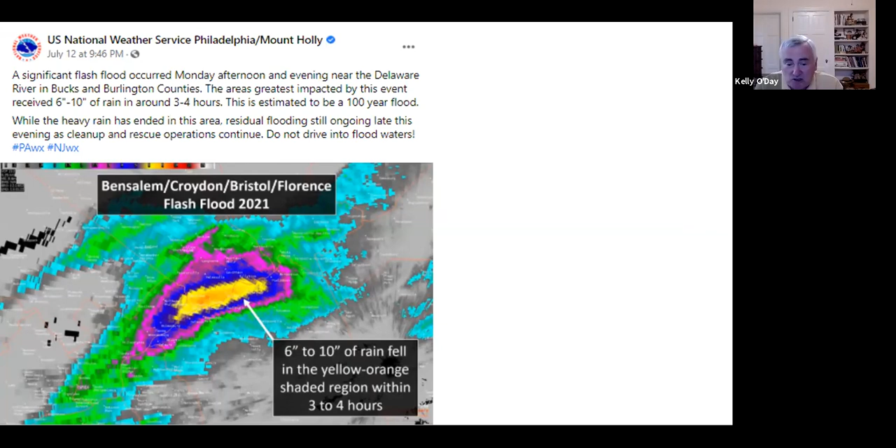In one area, like Germantown, we might not have seen much at all, and yet they got 6 to 10 inches of rain. So it's almost like a luck of the draw when a storm like this comes through, how much you get, and therefore whether or not you get a particular flood. So let's talk a little bit about this area, which was close to us. 60 homes were flooded out, so I think it's important.

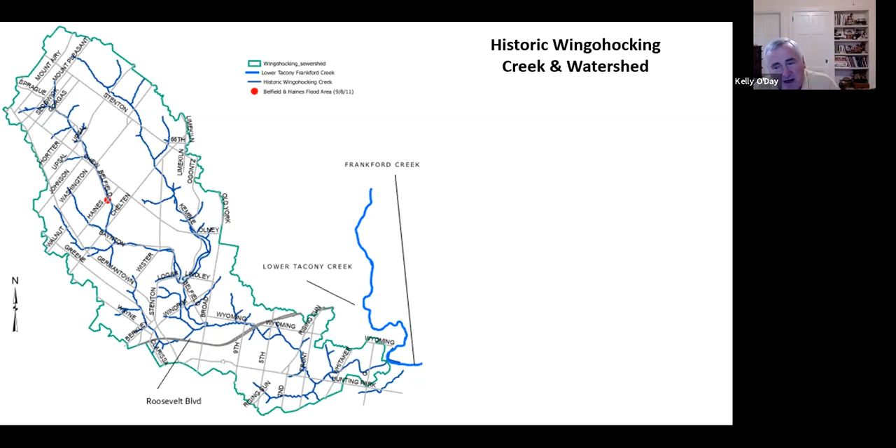If you don't mind, Kelly, if I could just ask real quick: does it being underground in a covered pipe, not exposed, help with flooding at all, or does that really not matter? It's going to come no matter what? It actually is going to come no matter what.

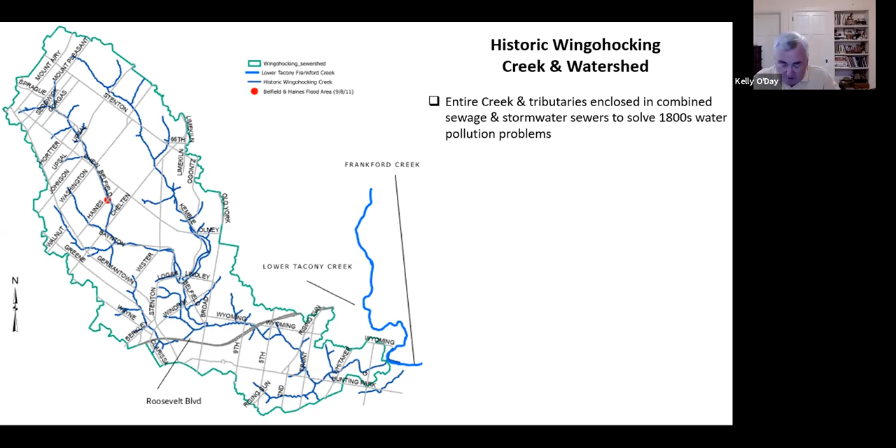It doesn't help. If you think about a lot of creeks, as we put in a lot more impervious cover, the banks got bigger and wider to accommodate the higher flows. Pipes don't get any bigger. The pipes were put in about 100 years ago with the best engineering of its time, and frankly today they're just not big enough. So it's the same as having a creek run straight through our neighborhood? It is a creek. In fact, you don't see it, but if that pipe is overloaded, it has to come to the surface, so it's just like every other creek.

So it was covered to solve water pollution problems. Now, in dry weather, all of our flow, that is all of our groundwater going into the sewer as well as our domestic wastewater, makes its way down to the Northeast Water Pollution Control Plant, right on the Delaware by the Betsy Ross Bridge. Everything works fine, it gets treated there and goes out into the Delaware River.

However, if we get a rainstorm like the one we just saw up in Bucks County, it'll overflow into what's called the Frankford Creek. It's the Tacony-Frankford; the Frankford is the part down by Juniata Park. And if it's bad enough, it will back up into basements and come out of inlets onto the streets. So it's nothing new. Basically, the creek was there, it had to be buried and covered, but we've got this problem.

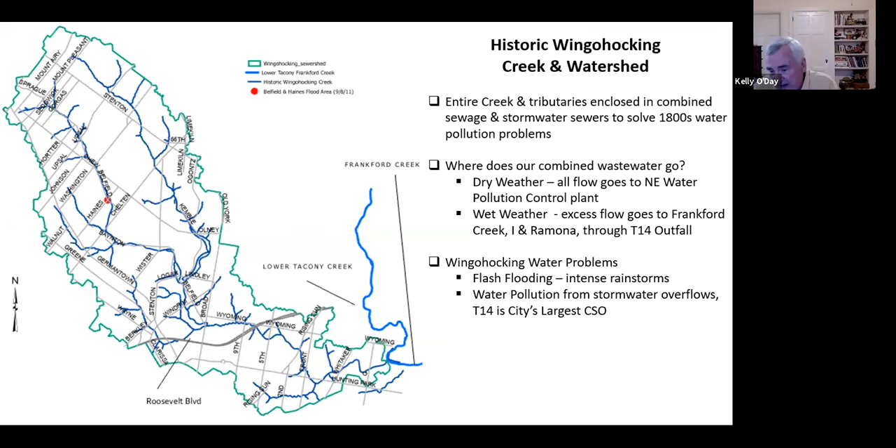So today, the Wingohocking is one of these unique areas in the city. We have a flash flooding problem with certain big storms because the pipes aren't big enough. And we have a water pollution problem when we get about a half an inch to an inch of rain. We'll overflow at what's called T14, which stands for the Tacony Creek, number 14 combined sewer overflow. We have a combined sewer, both stormwater and sewage, and in rainfall events we have a pollution problem coming out of that overflow. Now, this is what T14 looks like.

Again, that's the overflow. If you could go back 100 years, you would have seen the creek coming out there. But all the flow that would have come out there is diverted to the wastewater treatment plant, because it's contaminated water now that it's in a sewer.

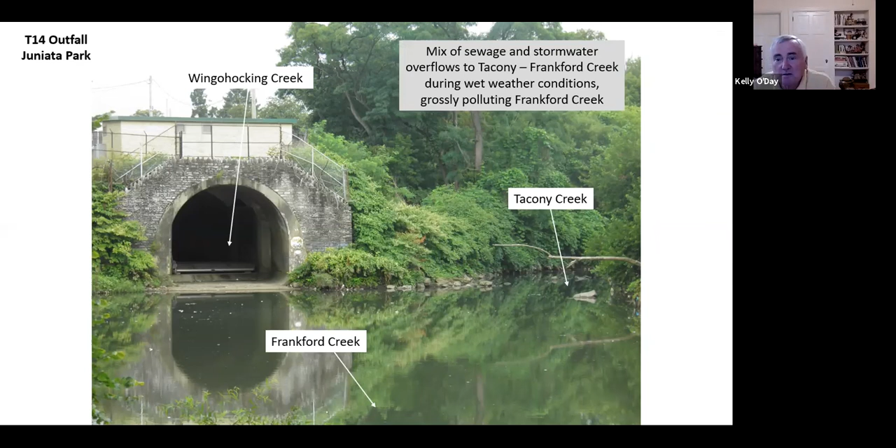Now that was already about 90 years after the immigrants started coming. So we have to think about it: there were no sewers back then. First we had dozens of people, then hundreds, then thousands of people with no sewers.

So what happened by 1889, the Wingohocking was a grossly polluted creek. We've got no sewers, we've got thousands of people living there. You can guess for yourself. So it was called the Wingohocking fever by people when they got sick. They blamed it on the Wingohocking. Physicians actually condemned the creek, and the Board of Health condemned it.

So in fact, it had such a bad reputation; it was 200 years of people moving in and so forth and not having any sewers or anything. And so the conclusion at that time was we got a culvert in, which means that they just basically took the creek and they put it in these very large pipes. These are very, very large pipes, and then brought it all the way down to where I showed you that outfall at Frankford Creek.

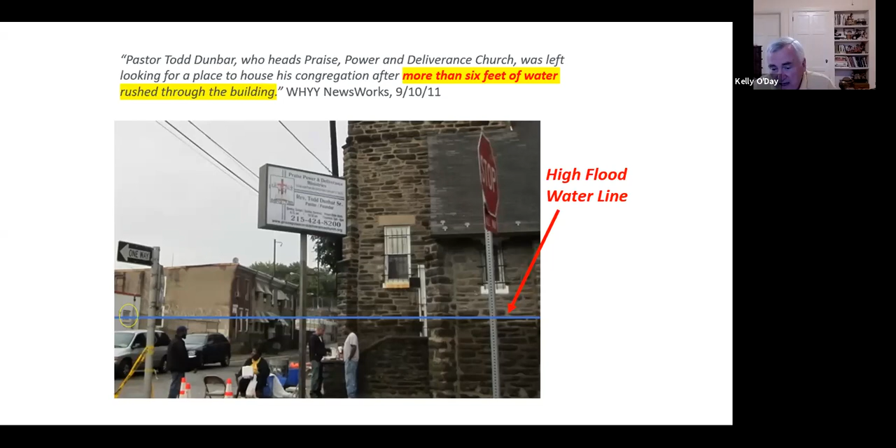In that particular case, that blue line there shows you the church that is right at the corner of Belfield and Haines. That gentleman is standing there. That's actually the water line for how high the water was. And so this poor woman was a victim of drowning because obviously cars these days, if you lose the power, you may not be able to open the door.

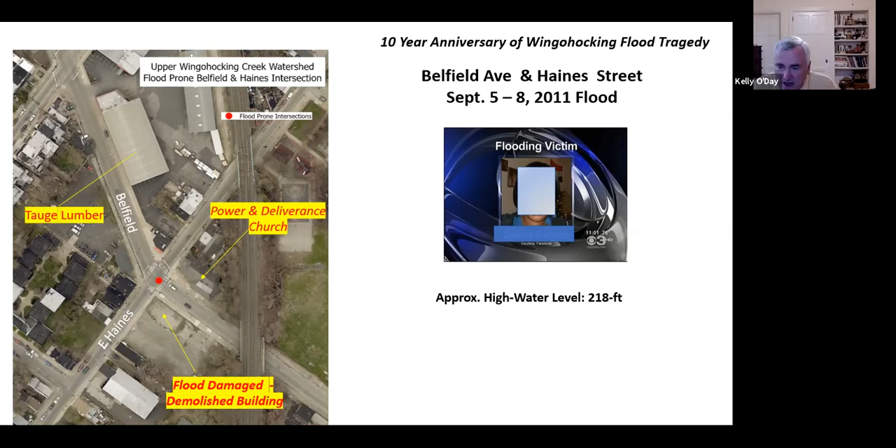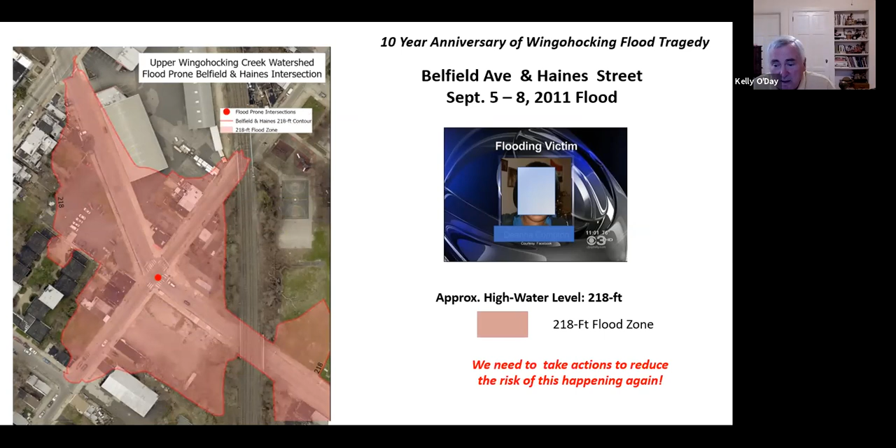So here's a little broader view just to get you familiar. If you're familiar with Tague Lumber, which is in that area, and there's a Rita's right there on the corner at Belfield and Haines. What I did to help myself understand is I figured out what the flood level looked like for that particular flood. And doing some simple calculations, I could get the idea of how extensive it was. And so somebody driving into that area, unaware that there's a creek underneath, it proved to be just an awful situation.

Whereas if you live near the Wissahickon, nobody lives right next to the Wissahickon. They live quite a ways away. And the Pennypack, but even the Pennypack up there in that apartment complex, they were living too close to the creek.

Okay, so why don't we bring the relevancy back to the people in this call, and obviously our main audience here is developers, but this applies to homeowners, landlords, builders in the area, whoever owns property or has a say in that area. How should they approach this problem, and how should they approach flooding protection in the historic Wingohocking Creek?

That's great. That's very helpful, Derek, because this is like an unknown problem. Yeah, that's what I was saying. Some people know about it, but not enough people know about it. So my goal.

What I was related to is it's kind of like a doomsday prepper, like someone, like, trust me, I believe you, but it's kind of like you're always saying, oh, it's gonna happen. How do you protect yourself when it finally does happen? Right. That's really what I want to do. And my goal tonight is to say to all of the builders there, please keep building, please keep rehabbing. We need many rehabs, but there's some things to do to be smart about it, and that's what I really want to sort of pass on to you tonight.

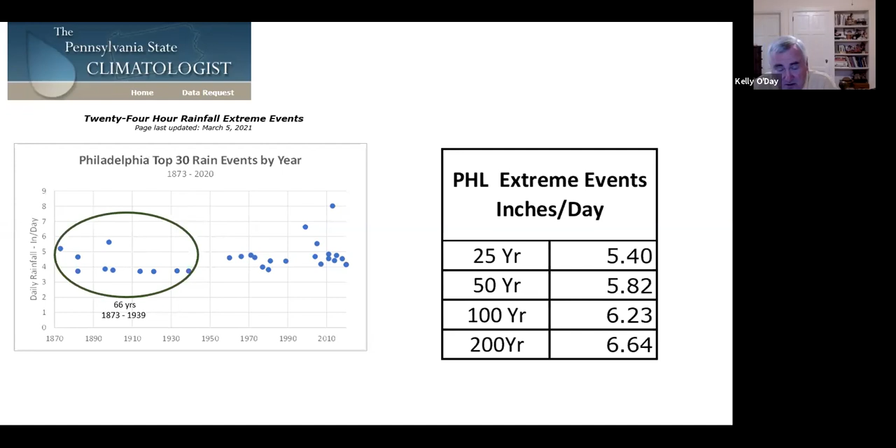But typically, and what I want to get across is, in the first 66 years of the record, there were 10 records. In the next 64 years, there were another 10. In the last 16 years, we've had 10 of these top 30. So if we've got a record over 150 some years, 10 of the top 30 have occurred in the last 16 years. That to me is clear evidence.

Our storms have changed. Now, this is basically Philadelphia International Airport. And what I showed you before with that radar, you remember with those multiple colors, obviously it varies. But if this is one place, the airport, year after year after year, it tells us something. It tells us that we've actually got a lot more intense storms now than we did in the past.

And then I've also included over here, when they talk about, from a design standpoint, the 25-year, the 50-year, 100-year storms, that gives you the idea from a design standpoint. We would have said a 100-year storm is 6.2 inches. We found, obviously, in Bucks County, it had 10 inches. So the problem for hydrologists these days is with the change in climate, we've definitely got to rethink our numbers of the sizes of storms.

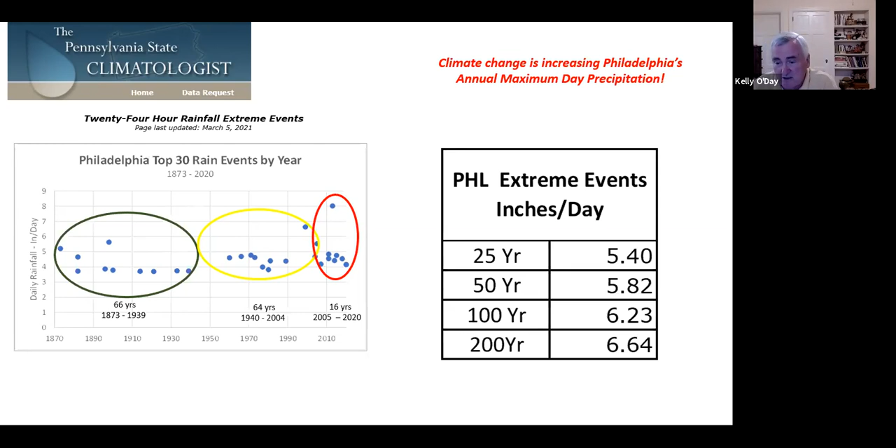So, all right, now with all that as background, you're thinking about redoing a house, getting a house, redoing that house. How do you go about evaluating it? Now, I can't make you an engineer overnight, even over a week. But what I could do is give you the right questions to ask people, okay? That's really what I want to do. So I've got 6 points here for you to think about and get the right answers that you can get from people. The first is, what are your potential flood entry points?

Sewer laterals. In a combined sewer area like the Wingohocking, there's actually a direct connection between your sewer lateral leaving your house and the creek. Now, in a sanitary sewer system, that's not the case, but in a combined sewer system, you're actually connected to the historic Wingohocking Creek. And so when the Wingohocking Creek comes up, that water can back up into your basement if you don't take the right precautions.

The second part of it is surface water. In other words, as the water comes out of the sewer onto the street, if it gets high enough, it can find basement doors, windows, vents, cracks, and other openings and get in that way. So you've got to be thinking about how to seal those up to protect.

Now, so once you've walked around your house and you've really thought it through, where can water get into my house? The next thing is to examine the flood factor map, and Derek's giving you the link to it. You put the address in, and they will give you a map of right in your vicinity, and it will show you, are you out of the flood area? Are you in it? Where are you?

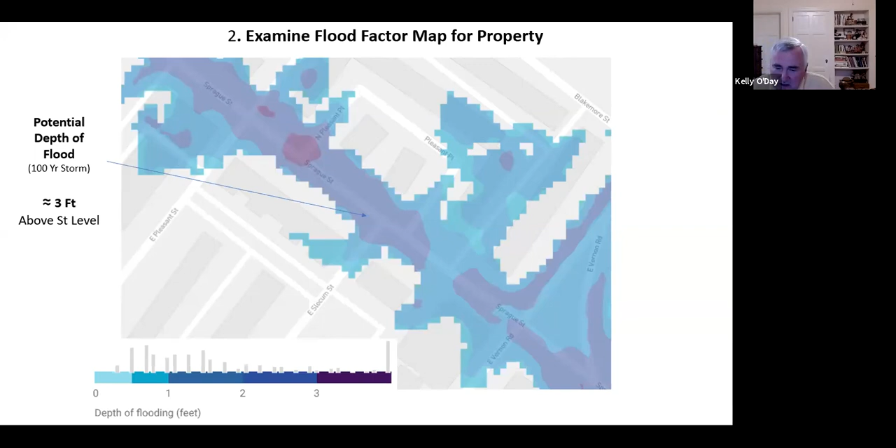So now that you know that, you say, okay, my area is subject to about 3 feet. What does that mean for that door that I showed you? And what does that mean for the window and the garage door? And so what you do, and this is where you may need an engineer, is a topo map, a topography map, to see what are the relative elevations. And so that's where you really need to go through and say, okay, I've got a 276 foot elevation at my street. It's going to be 3 feet of flooding on the street. What does that mean for my windows and doors and my garage door and so forth?

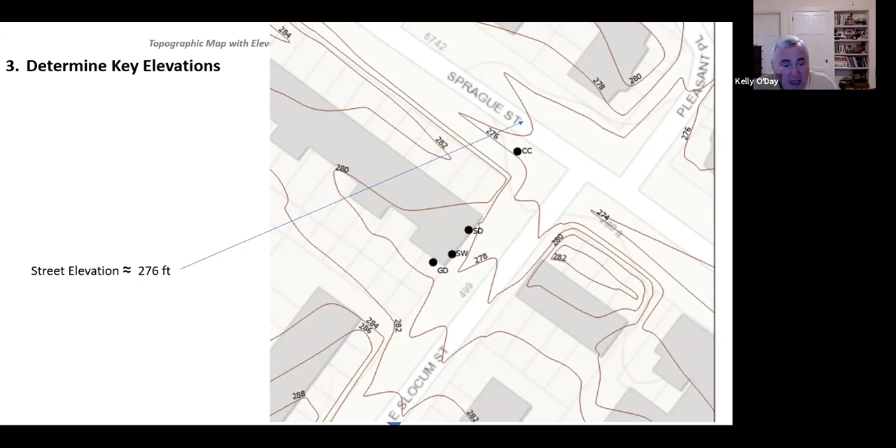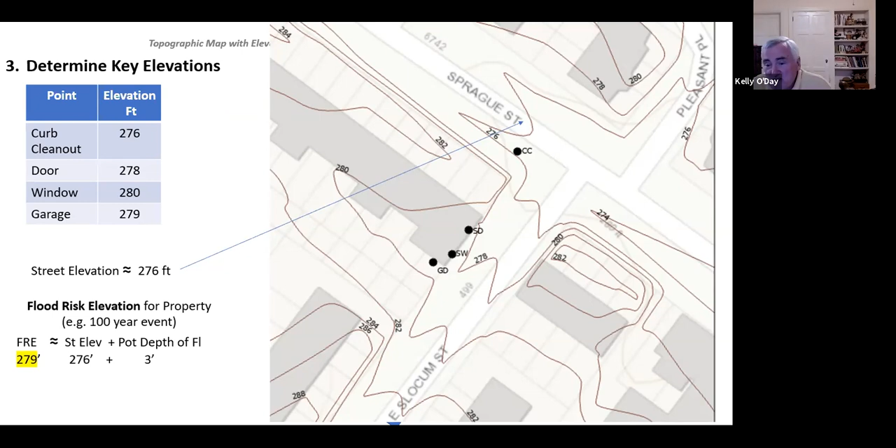And so what this does is this says, all right, I've got these different locations I've got to worry about. I've got a door that, best of my judgment from looking at the topo map, is about 278, the window's 280, the garage is 279. Now, what's the flood risk elevation for my property? My estimate is it's 279 feet. Anything below 279 feet, water could get in. If it's above the 279, I'm not concerned.

So what that says to me, I would definitely be worried about my side door as being exposed to floodwaters that could in fact get in, and the garage door. Garage doors are something that could well be a risk. So you want to look at those and make sure you've protected them. But also in a close examination, you might find there's some vents, some dryer vents, other kinds of openings. You have to really look very carefully to make sure you catch those.

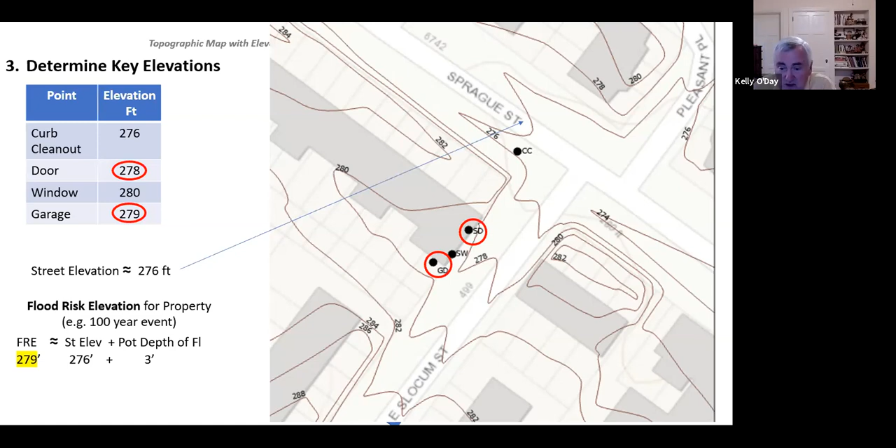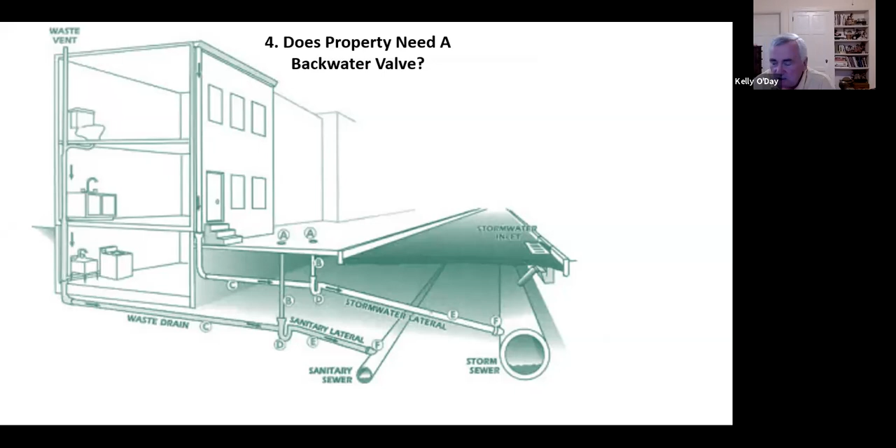Now, the other thing you've got to worry about is your sewer lateral. The sewer lateral, in this schematic, it shows you we have a house, we've got a sewer in the street, and we've got a sanitary and a stormwater lateral. In our case, both of those are combined. We only have one sewer for both storm and sanitary. And so what happens is we need to find out, and this is in the plumbing code, and truthfully I wasn't as aware of this as I am today. I don't go around reading the plumbing code, but it turns out it's very, very important to us.

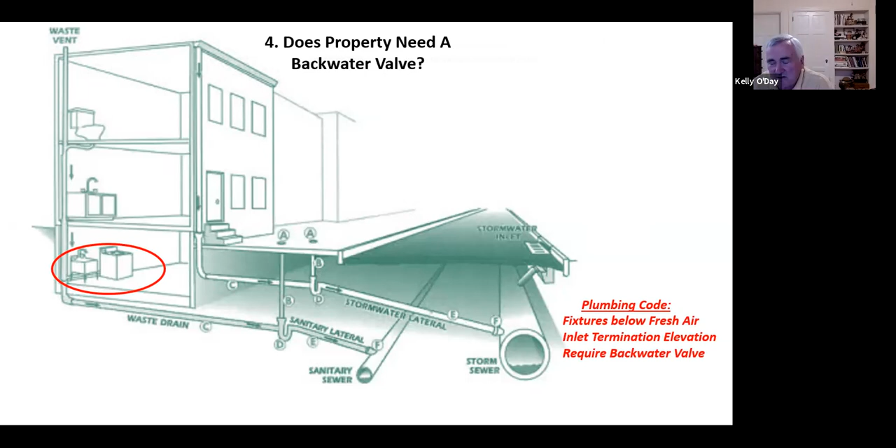And the plumbing code says if you have any fixture below the fresh air inlet termination elevation, what the hell is that? You have to have a backwater valve. Well, it turns out that the elevation of that curb trap that I showed you before is actually the same thing as the inlet termination elevation that's in the code. So what you have to do is find out what's the elevation of my curb trap vent, and then project back to say, okay, do I have anything below that level? If I do, I have to put in a backwater valve according to the code.

Now, what I want to make sure is that you ask your plumber, you ask them a second time, a third time, because they may or may not be completely up on it. But it seems to me, if there was a flood later, people will ask the question, was there a proper backwater valve included? Because it's in the code, so it needs to be included. And that's where the due diligence aspect of this thing comes in.

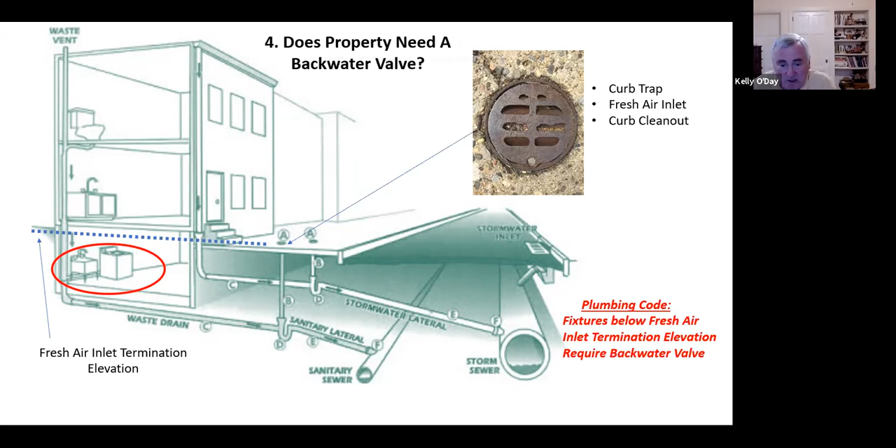I'm gonna have to say that a lot more times before I'm comfortable with it, but what I've shown you is that cap. You can look at it in the street. It's the vent, basically. It's a trap vent for your sanitary lateral.

If I could stop here for a second, I just want to ask. Again, I'm always thinking about the developer side of things, and if somebody's coming in and purchasing a property, they've only walked through 2 or 3 times. I think it's important that you hit on that, that you should ask your plumber once, 2 times, and 3 times. That's going to be the person you're going to want to talk to all this about, right? Is there any other people in the development process that you think should be in tune to this, or is the plumber your go-to person?

Well, I think the plumber is definitely a go-to person. And if it was a development project, you'd have a civil engineer doing a site plan. This is one of those questions that really needs to be carefully evaluated. And so the project architect might want to look at it and possibly have an engineer look at it. The plumber obviously can read the code. The code was modified in 2018. So this is not a long-term thing, but it is in the code right now.

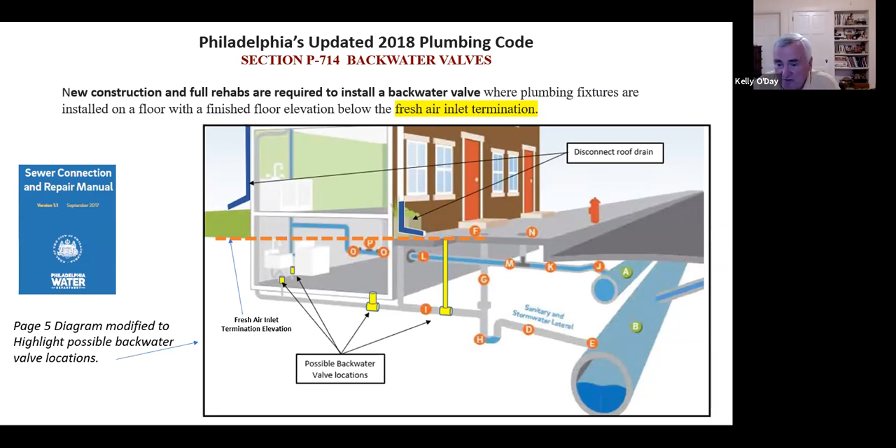The water department has estimated 2,700 homes in the Wingohocking area, which is, again, East Mount Airy, Germantown, and Ogontz, are subject to backwater flooding potential. And I don't think that there are 2,700 backwater valves in. I really don't know, but I just want to make sure everybody is sensitive to that topic. Now, if you're a homeowner, you may be eligible for a free backwater valve, depending on a particular set of circumstances. So some of our listeners tonight might want to check and see if they can possibly be eligible for a free backwater valve.

Okay. So should we talk about flood insurance now? Yeah, I'll talk about both, a little bit about the flood proofing and then the flood insurance. So what we did is we basically walked around the house and we said, okay, what are our risks? We've talked about the backwater valve being a very important part of it. The second part is, have we got any weak points where we can get flooding coming through a window or through a crack in the foundation that will let water in?

So it turns out that Philadelphia has an excellent set of regulations for floodplain areas. Our situation is we're in a flooding area, but we don't have designated floodplains. We have the same problem, but we don't have a floodplain, so we don't have to comply with the floodplain regulations, and yet we're very vulnerable.

And so my argument to everybody is, if you've gotten some evaluation that says your basement is at risk, you should seriously think about protecting the heaters and furnaces, things like you can elevate them, and electrical panels. If you have a flooded basement and you want to turn the power off, guess what? You've got to go into a flooded basement to turn off the power.

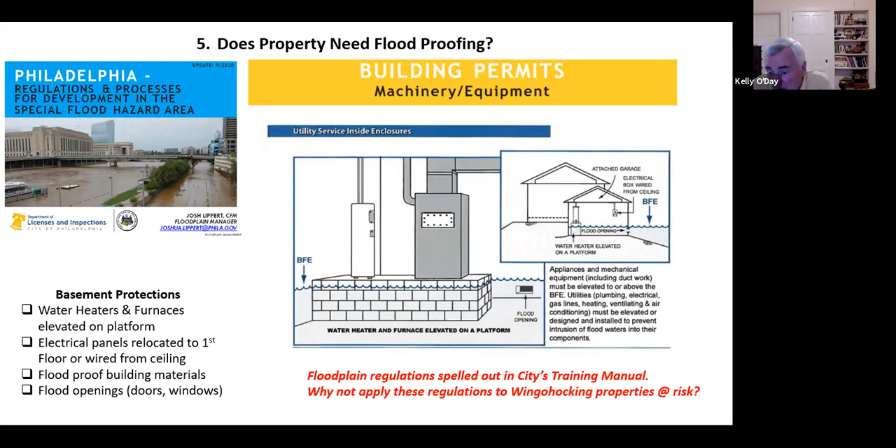And so the regulations are spelled out in the city's manual. They're not required in the Wingohocking because it's not a formal FEMA floodplain, but it's needed in some cases. And so you need to really think about that very seriously. So then the last part of this that Derek brought up was the FEMA flood insurance. A lot of people are reluctant to get the flood insurance. Hopefully, when you look at the flood factor map, you may rethink that.

But I also have some good news. The good news is that as of October 1st of this year, FEMA is changing their risk rating method. And it turns out that since we're not in what they call a special hazard area on the flood maps, our rates for flood insurance will actually be lower than they would have been if it had been a formally mapped area. But our protection, flood insurance, would be just as good.

So if you've looked at flood insurance in the past and been discouraged by the price, October 1st, the prices may be more attractive. And if you're in a flood factor area, I would seriously encourage you to think about that flood insurance. And remember, that flood insurance is for the property, not the person. So if you were to start flood insurance, that can stay with the property as a way to protect future tenants of that house.

So I'd like to now shift gears a little bit and talk about how to be Wingohocking flood smart. We have different problems. If you lived in New Orleans, they've got their dikes, and they've got a whole set of problems quite different. Pennypack has a different one. If we lived in the Darby Creek area, we'd have a different set of problems. So the flood problem area is different for each one of us, depending on where we live.

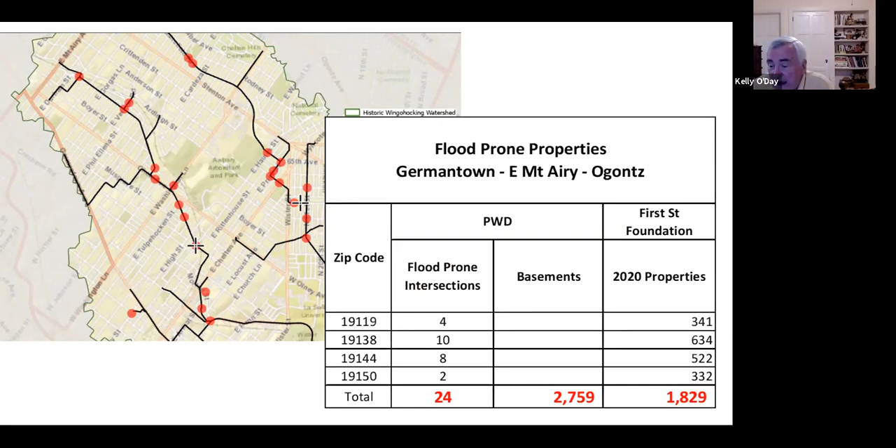So in our area, we have 24 flood-prone intersections, 2,700 basements at risk, and 1,800 properties in the flood factor designated flood risk areas. So you've seen these road may flood signs for 10 years. Anybody in this audience that hasn't seen one of these in the Germantown Avenue area may not have been paying attention, but there are quite a few of them out there.

For the due diligence, and Derek has said this before, I'm asking that you please ask, what about Wingohocking flooding? Just like when I sent Ken that note about a property that had just been sort of evaluated, it's a nice looking property, but it was in fact in a flood factor area.

And I think we need to keep re-asking, because when Derek mentioned what the plumber thought about, do we need a backwater valve? If he says no, he might be right, but keep asking just to double check. Like if you hear a doctor say, oh no, it's not a problem, you might get a second opinion.